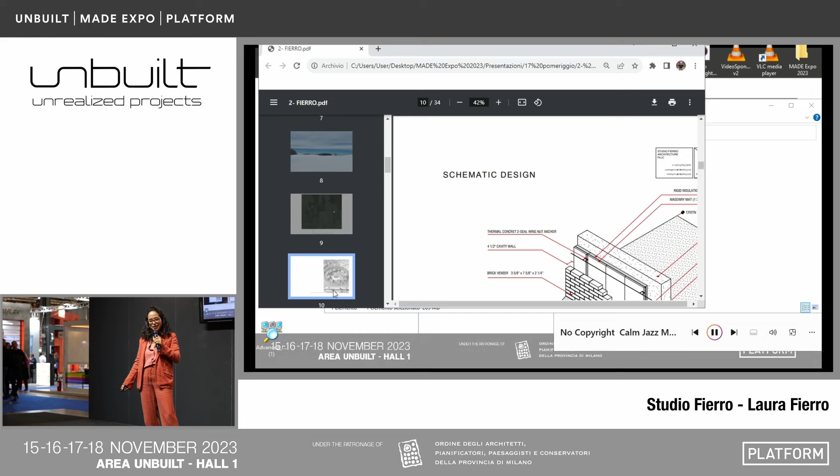Thank you. As I was saying, it's a triangle, and it's an interesting piece of land because it's very binary. Half of it is a forest, half of it is a field, an open field. So we engaged with a local farmer to take care of the field.

In our discussions, he actually pointed out that he was going to till the land to oxygenate it. It's prime agricultural land, so it's very good soil for agriculture. In those conversations, he mentioned that we should pick up arrowheads. We were very intrigued by this idea, like, what do you mean arrowheads? And then I started going back to research, because research always points us in the right direction.

And I discovered that there's a monument. Is this a pointer? Is there a pointer? It doesn't work, no? Over here, I'll show you. Over here, there's a monument, a historical monument, that is the Mohican Moravian monument.

When I started doing the research of this story, it's about an ideal community of Indians and Dutch people, Native Americans and Dutch people living together in communion. They even have some art paintings that are physically in a museum in Germany, because it was a very rare situation. They were marrying between each other, they were working together. It was really like an ideal community.

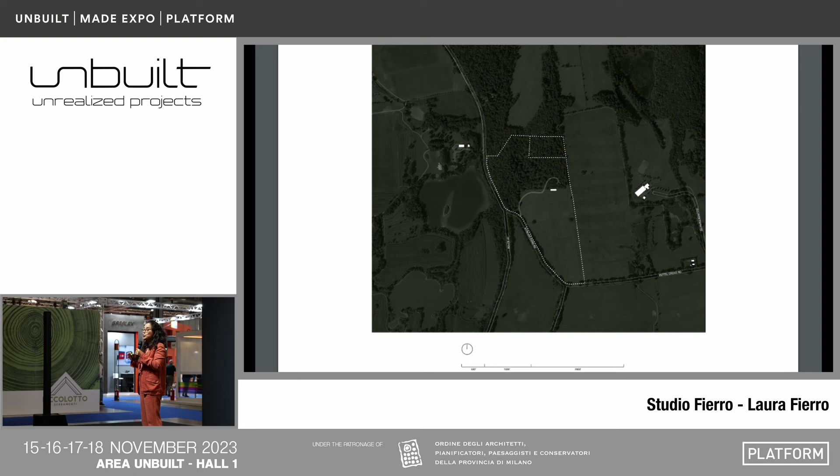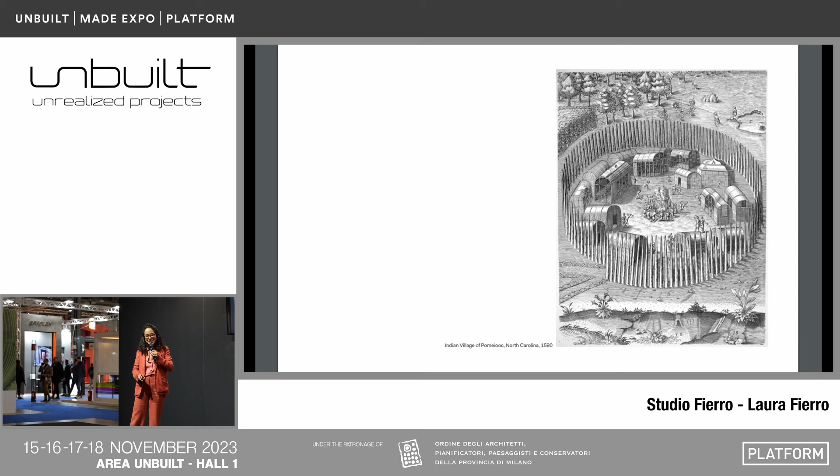Can you do the next slide, please? Thank you. So to my surprise, when I started looking at the villages where they were living, these images started coming up, which to me were extremely modern in shape and closer than what I thought to our time, to our construction methods. These are the longhouses. They're called longhouses. They're made out of wood.

But this is the classical village of the Mohicans or the Iroquois. And that fence around it is called the Palisades. One of the main highways up there is also called the Palisades. It's interesting to see how these layers of history accumulate through the centuries, and we carry on things that come to existence from the past, where we kind of lost the link.

So I was very intrigued by this story, and then I was actually quite excited to do a modern longhouse of our times with a commercial construction type of method that could also create this vaulted ceiling. I'll show you a bit more.

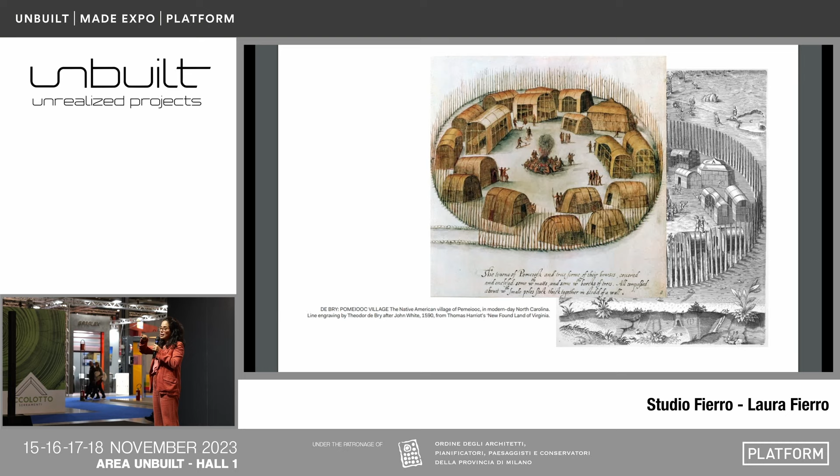What's quite interesting is that it also deals with the snow, because I wanted to avoid the typology of the gable roof, which is multiplicated in America. America has decided and designed a whole system based on quicker, faster, and cheaper. They have a series of products that everybody has access to, but that's why in American suburbia everything looks exactly the same. There's repetition, no style, no difference, no identity. Everything is the same, with materials that are actually thought for the short term.

So I was excited with the challenge of using those materials, but in a way that they could be more resilient and with bigger longevity.

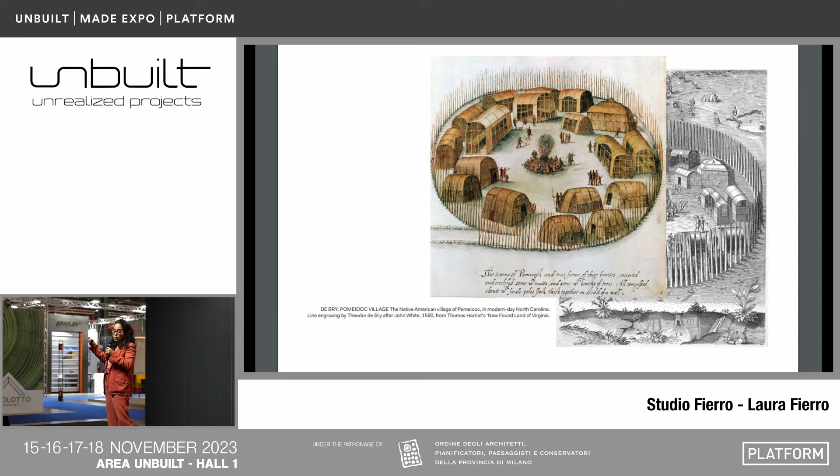Also, the other important information is that the underground, the geological layer of this project, is all sitting on a bedrock of limestone, which is a very porous stone. So there's a responsibility of keeping this land clean, because everything you put in, the water, any pesticides, would actually go back to the water mantles. We felt the responsibility of understanding the underground to keep this precious land as clean as it has been for the last 600 years.

So what we did is we created this almost monastic architecture. I mentioned I'm originally from Mexico City, but I've been living in Paris, in Brazil, in New York. I left Mexico City almost 20 years ago, so I started accumulating a lot of imaginaries that go beyond architecture or construction. All these imaginaries came when I was designing this house, because in a way, this is very similar to the convents where I grew up.

I was always fascinated that you would go into these convents with very thick walls that were super fresh in the summer and warm in the winter. They create this spatial experience, unlike any other buildings I've been in. Of course here in Europe you have beautiful examples of that, but in our case it was like the colonialism and the structures that came out of that colonialism. So in a way, to me, it was a very familiar space.

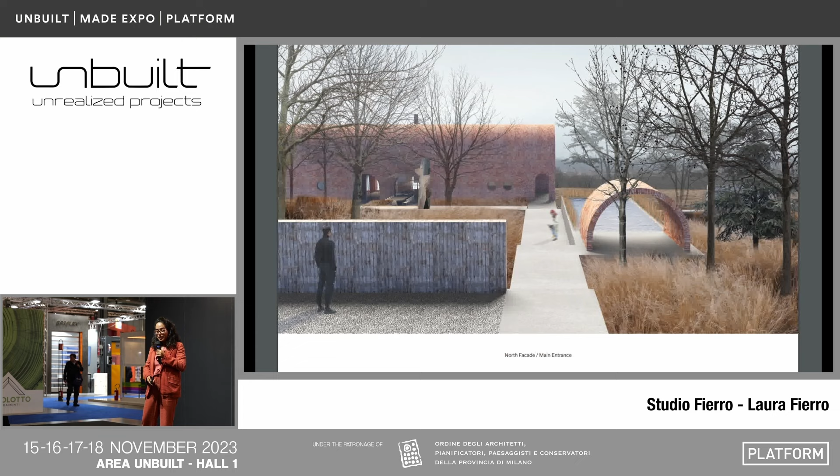So we started this project with the idea of a lifetime project, and we also wanted to keep it enclosed in a way, but also have access to this beautiful landscape that we get to experience.

So it was thought as a passive house. It's a longhouse, and it still respects the dimensions of the longhouse, which is like 10 meters by 30 meters. It's oriented east-west, so it gets all the exposure from the sun. It has these overhangs in the windows, so in summer you can get protected from the sun, but in winter all the sun comes in, activating the thermal mass, which is the brick and the concrete working together.

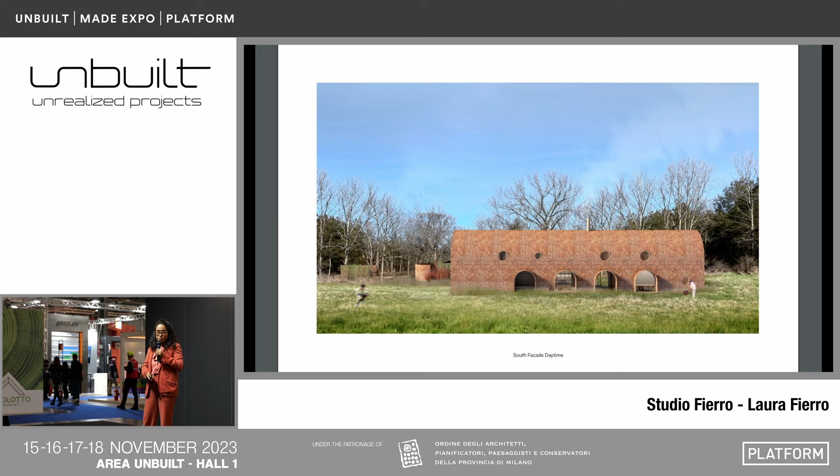Also, one thing I forgot to mention, the land was half a forest and half a field, so the house sits right at the intersection of both to be protected from the elements, but still get all the sunlight from the south.

And the way we built this, because at the end we have to do something with available labor and existing materials, as I was mentioning, we went back to the cavity wall.

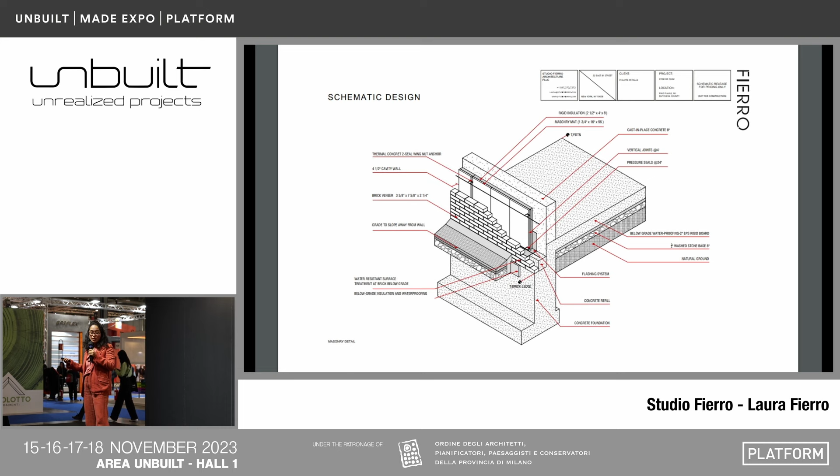The cavity wall is a construction system that's been used for schools. It was originally used for domestic houses, but it became prohibitive. Labor changed, other products came into the market, so there were fewer brick masons. So it was extremely used for schools instead. All the schools you've seen in films in New York City, these iconic schools where people are playing basketball, it's basically this type of construction. So that was working in our favor.

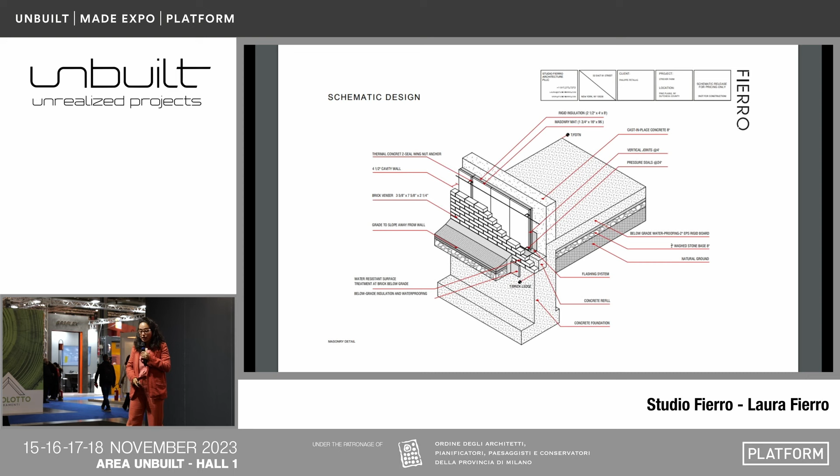And then for the vault, we had to think about something that would also work with available standardized elements. So we came with this idea to use precast bridge arches, which you can buy for a very accessible price. We decided to put 17 of them to create this vault. They sell the connections, and it was quite accessible compared to actually trying to pour a concrete vault the way they do it in Mexico, with the labor. It was just impossible. But this made it possible.

And we would actually cover it with the brick on top. So that was all working really well. It's basically a concrete foundation and concrete structure, all covered by brick. And that's the concept of the cavity wall.

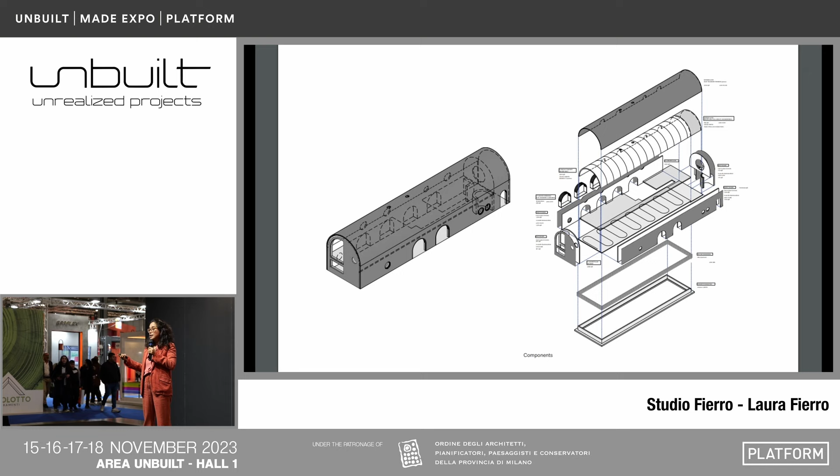So these are some of the images. As you can see, the land starts sloping from north to south. So all this part is the forest that I was showing you before. And then this is where we removed the trees so you could actually see the image. But the south is in that direction.

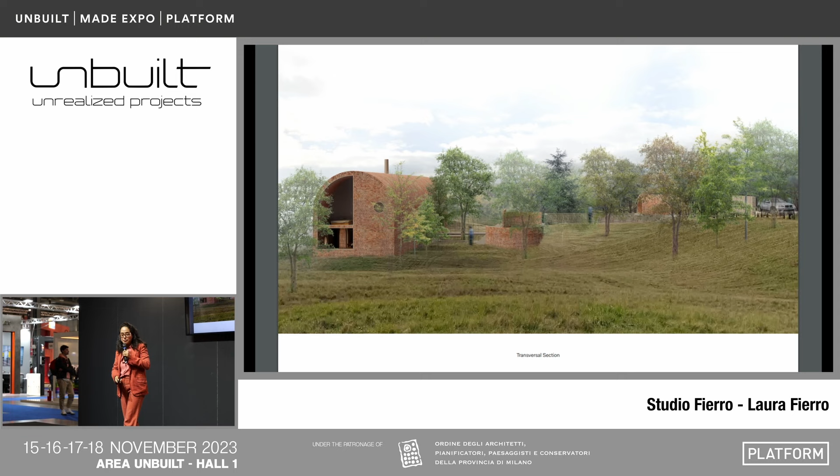So the bar of the house would be exposed to the south, but all the public patios and activities, more family activities, would happen inside the forest. That's why we have this series of patios, like a gravel patio, a green patio, a water patio, all inside the forest, so it's never seen, which gives you some privacy.

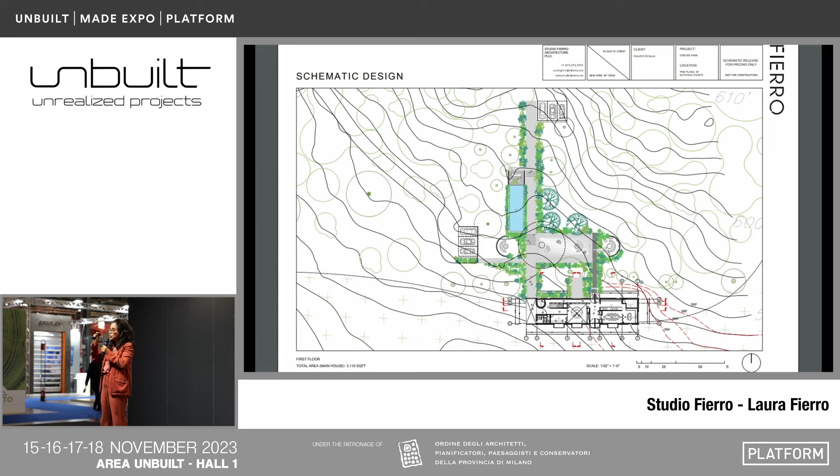Also, because we had all this material, I mentioned the limestone, and when we were digging we used a technique called cut and fill, so we're using everything we find on site. We found huge boulders of stone — I think we collected 100 of these boulders — and we can crack them into smaller pebbles for the roads and the patios. So we're trying to use all that material to stay within the site and avoid transportation and all that.

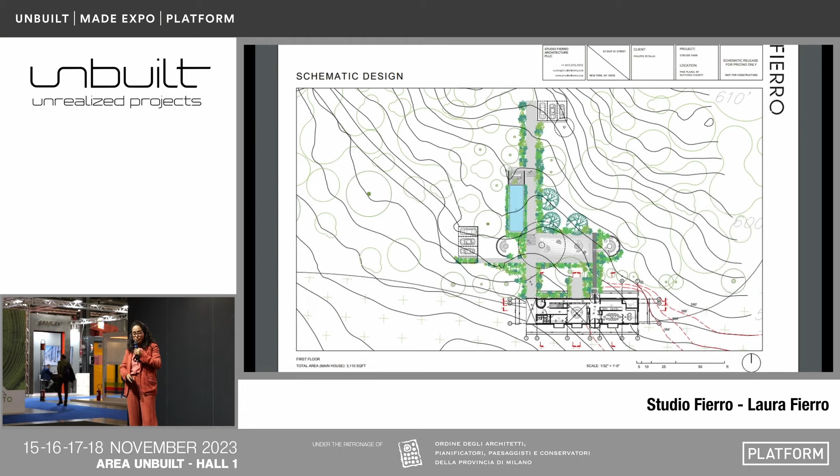So let me show you — yeah, these are the plans. Just to show you quickly.

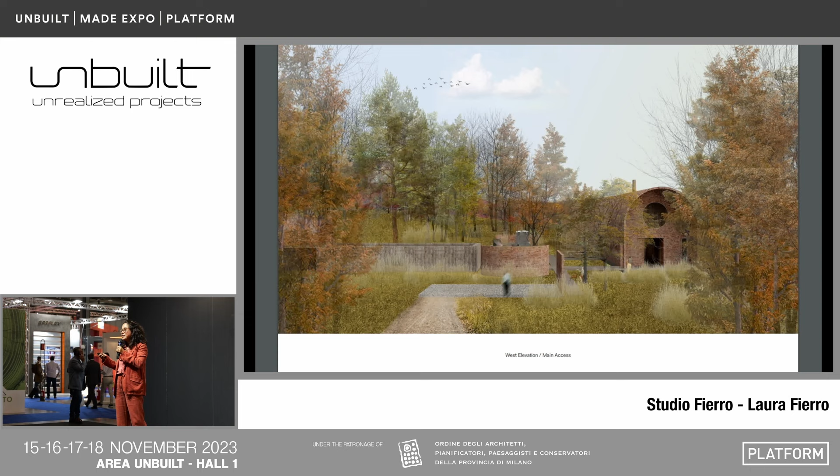And I'll just show you some other images. These also show the change of the house through the seasons, because for us it's one of the most beautiful things — this possibility of having like 4 projects in one. It's always very exciting, as I'm sure it is for you.

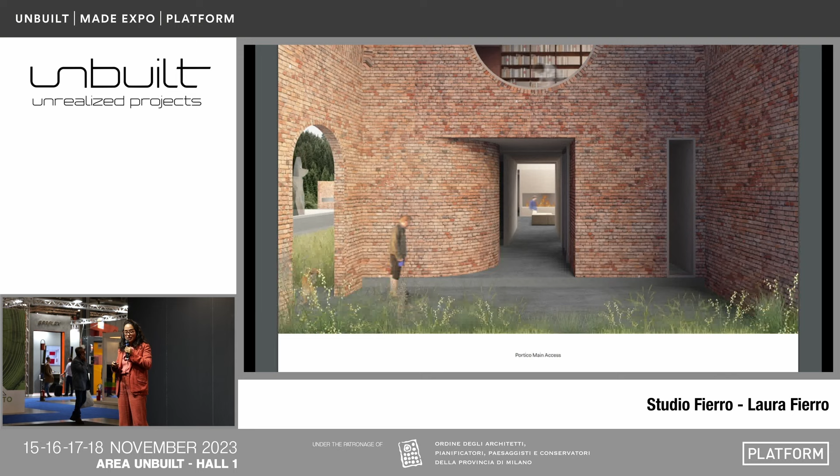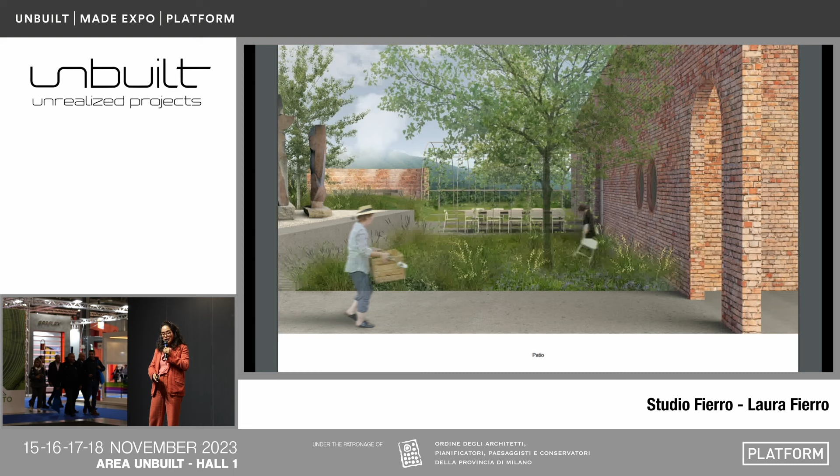And this is like the portico, the entrance, that was the main access of the house. An outdoor seating area happens on the northern side of it. You know, one of these patios.

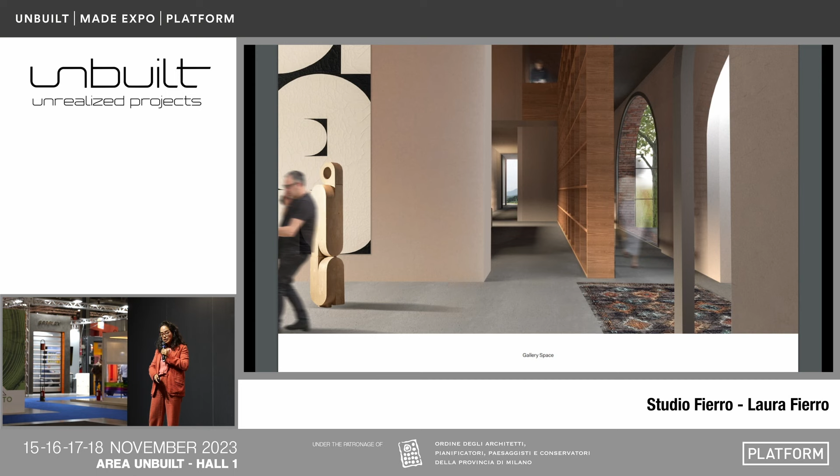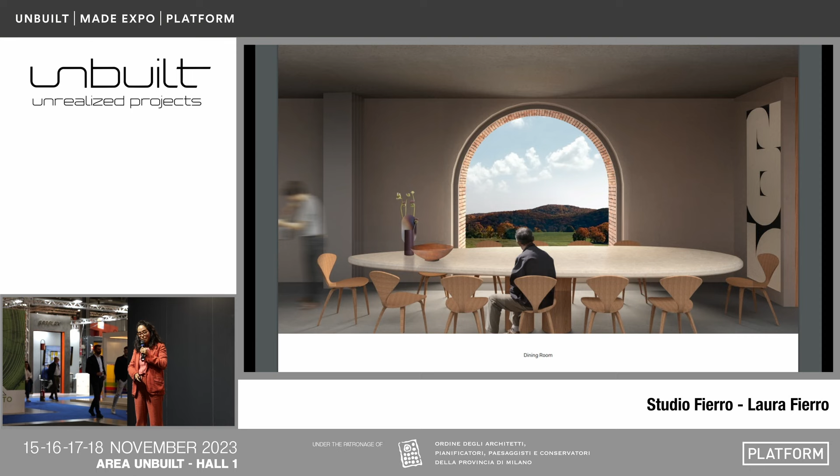Some of the interior images. Looking south, those are the big windows with the overhangs. The master bedroom looking east. And these are all like the real pictures of the site.

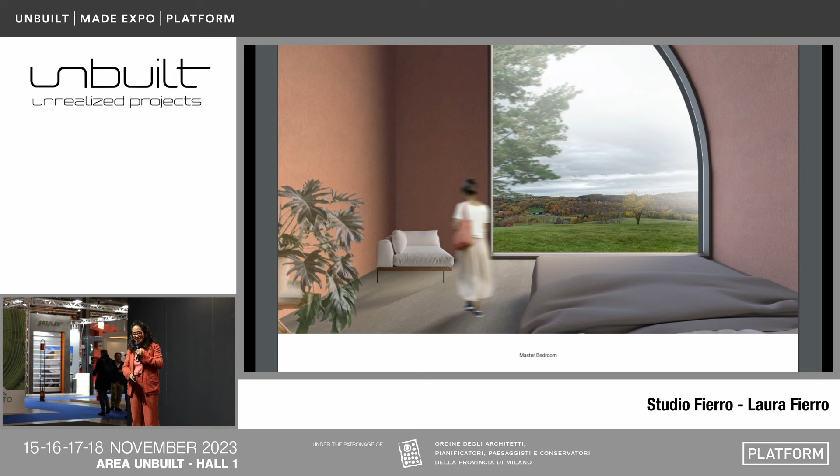So it's just like you really want to make honor to it. And this is another thing, like changing the seasons, how it looks.

And another thing that was quite nice to us is that this pool — the code in New York State always asks you to have a pool with a fence around, like a 1.20 fence, which really kills the beauty of it. And we thought, well, that's a terrible law, but how can we bypass it?

And we came to the conclusion that given this topography, we could embed the house in the topography, and the circulation was lower. So the pool is always elevated, so you're never really at the level of the pool. So already the pool is elevated.

And then another piece of vegetation, so the only way you could actually access the pool would be from the front, and there you would have to put some kind of fence. But we're always trying to find ways to deal with the code, as we all do, trying to find ways around it and beautify things while still maintaining code compliance — that's what we try to do.

Let me see if it keeps advancing.